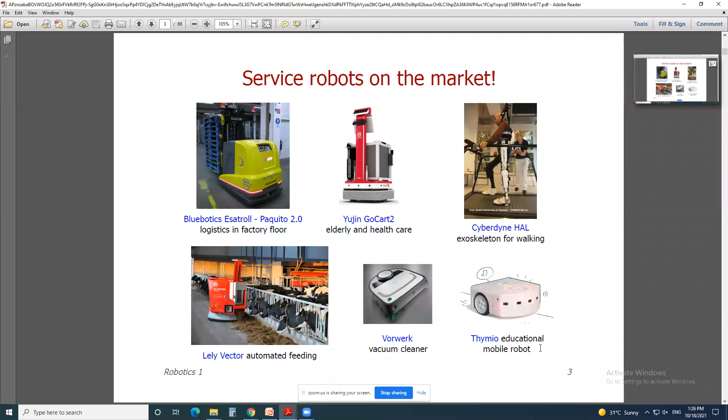Now space robotics, you are knowing that service robots are used for space exploration also. In 1997, NASA first sent the robot to explore the Mars mission.

Mars means Mangalyaan. This is the upper panel, that is the solar panel, because of which solar energy can be used to drive this robot. This is battery operated robot, and since wheels are there, this is known as wheeled robot.

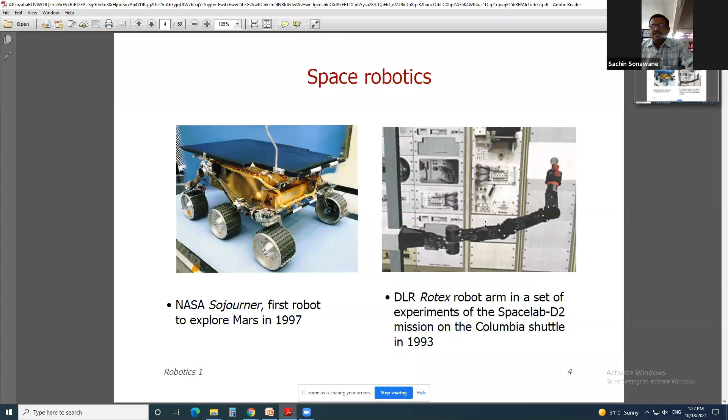Now this is known as Rotex robot arm, which is used in Columbia Space Shuttle in 1993. In Columbia Space Shuttle, our Indian woman was there, that name is nothing but Kalpana Chawla. She died because of that space shuttle accident.

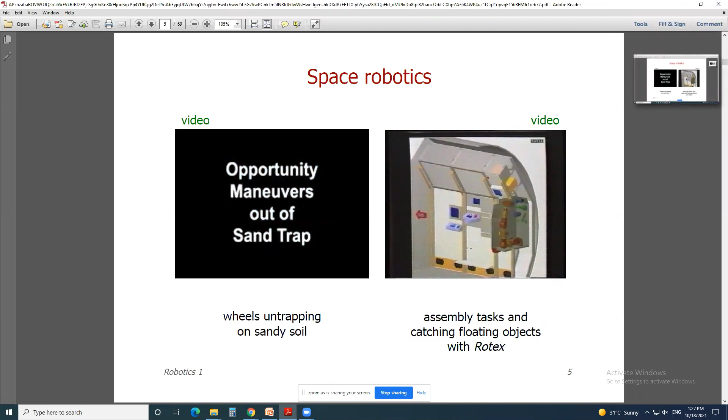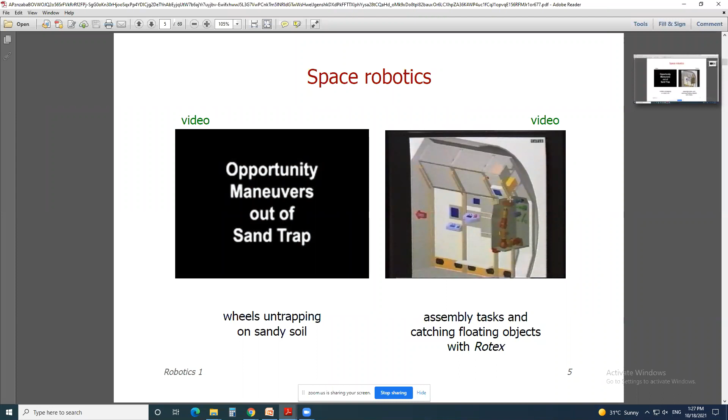Now space robotics. Robots are used for assembly tasks and catching floating objects with Rotex, that is in space robotics.

Then again here space robots are there. You just see here robotic arm, SSRMS Canadarm in operation on the space shuttle with outstretch of about 17 meters. See that this is the robotic arm which is operational in the space shuttle. This is the space shuttle.

Then these are the service manipulators. Service manipulator SPDM Dextre on the International Space Station mounted on a supporting rail and used to refuel satellites. Therefore, these small robots are mounted on a rail and they are used to refuel satellites.

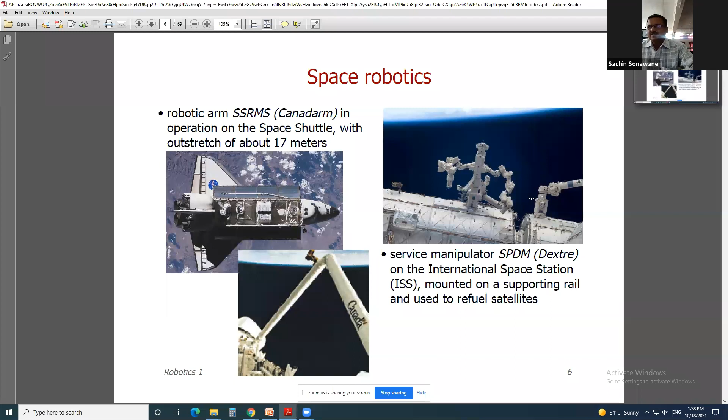Now, underwater robotics, typically actuated by thrusters, directional forces on the tail. Therefore, in case of underwater robotics, they are actuated by thrusters, and these are the directional forces which are acting on the tail.

Cannot translate sideways. These robots cannot roll, that is, they cannot turn sideways. Maneuvers are necessary for them. The different maneuvers, maneuver means what? To move forward or to move backward.

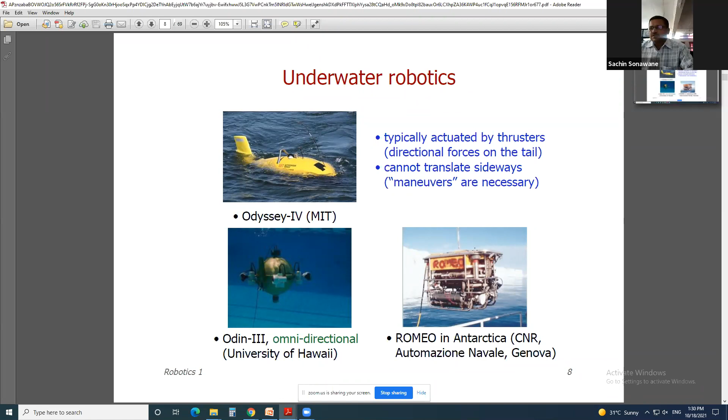Then this another underwater robotics is there. Omnidirectional, University of Hawaii, that university has manufactured this robot. Then this Romeo in Antarctica, CNR Automazione Navale Genova. Therefore, the name of this robot was Romeo, and it is used for Antarctica exploration.

Then underwater robotics again here. Ansaldo underwater arm performing a cable hooking task. See that this underwater robotic arm is there and it is used for cable hooking. This is the hook.

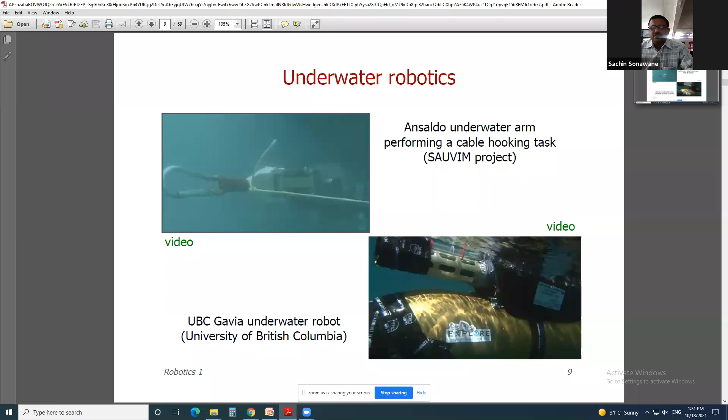Again, UBC Gavia underwater robot. See that this is the underwater robot, and this is the arm. University of British Columbia has manufactured this robot arm.

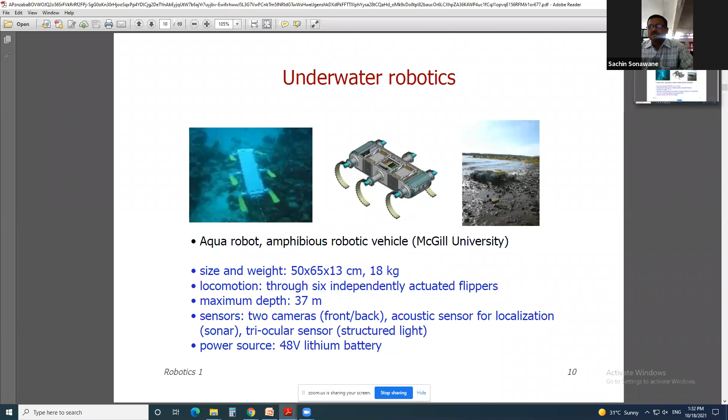Power source: 48-volt lithium battery. This robot is battery operated, its voltage is 48 volt, and this battery is a lithium battery.

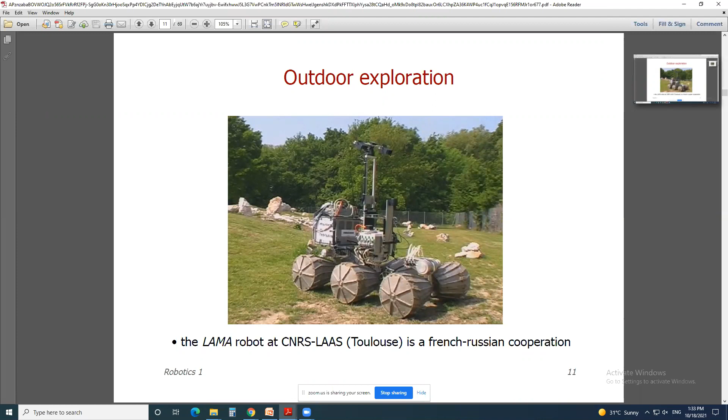Now service robots are also used for outdoor exploration. See that this is a wheeled robot. The LAMA robot at CNRS-LAAS is a French-Russian cooperation. Outdoor exploration means whatever is outside our home or on the ground - this robot is used to study rocks or the nature of the soil, for outdoor exploration, or to capture images in the jungle or wherever in the terrain where humans cannot reach.

Now volcanology - you know volcanoes. Near the volcano, because of high temperature, it is very dangerous to reach near it. Therefore RoboVolc vehicles are used on the surface of the Etna volcano - wheeled and tracked robots. This wheeled robot is used near the volcano to study the soil and rocks, or the type and temperature of the volcano. To study all these things, wheeled and tracked robots are used.

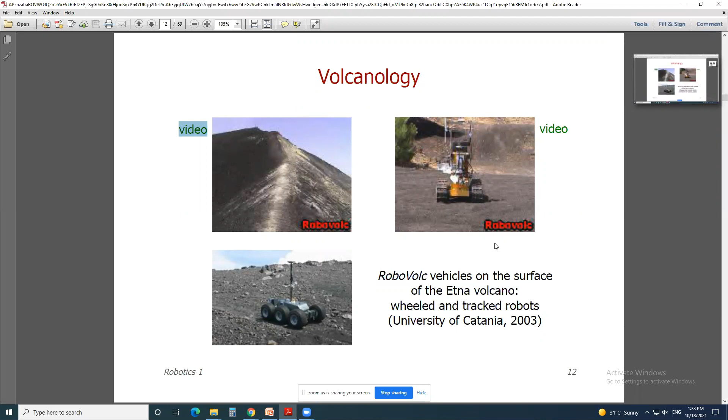Now for demining purposes, robots are also used. This is a teleoperated mobile robot on tracks, used by the police for bomb disposal.

Then PEMEX, a lightweight anti-personnel mine detector, weight 16 kg, maximum 6 kg for wheels, two 70 watt DC motors, oscillating sensorized head. This robot is used for mine detection. It has two wheels and some additional structure. Total weight is 16 kg, and weight of the two wheels is 6 kg.

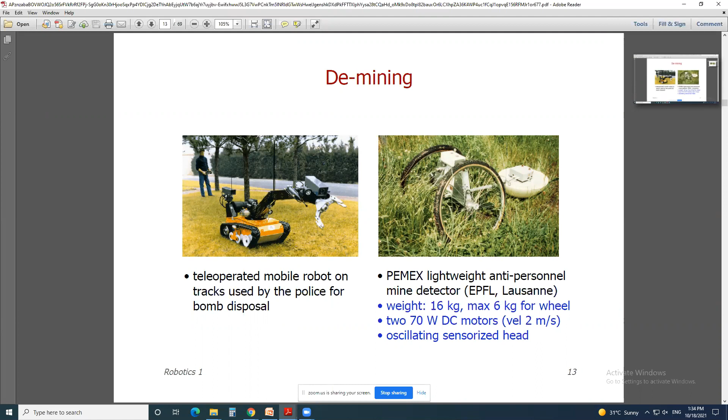Now service robots are also used for medical applications - this is known as medical robotics, for patient aid, meaning assistive applications. Here is a deambulation support system from Trinity College, Ireland. This robot is used for a deambulation support system, so that the person holds this robot in hand, and when the robot moves forward, the person follows it.

Then the MOVAID project, for the aid of disabled people in home activities. This robot is used for disabled persons - in India called Divyang. For Divyang persons, this robot helps them. See that in this robot's arm there is a glass of water, so the robot will give a glass of water to the disabled person.

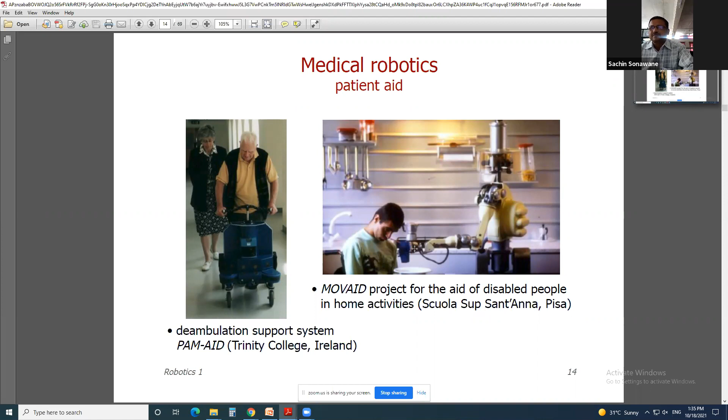Then the MOVAID project, for domestic activities using the 8R Dexter arm. See that there is an oven, and this robot is used to keep some food or something in the oven - the robot operates this oven.

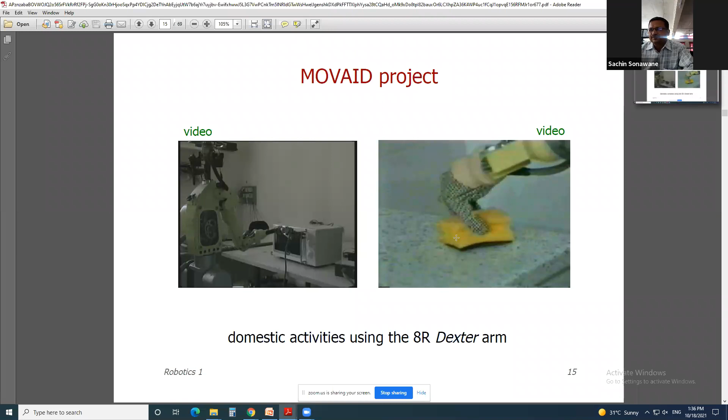Now again, for medical robotics - rehabilitative purposes, robotics is also used in medical industries. Rehabilitation is, as you know, when a person's arm or leg is amputated, a robotic arm or robotic leg is used in its place. That is nothing but rehabilitation.

Therefore a robotic arm with shoulder and elbow having full mobility and a gripper hand is used, developed at Pittsburgh University, and is also available in the market. In tests on monkeys with immobilized upper limbs, motion commands sent to the arm by the central nervous system - that is the brain - are measured by a set of electrodes and used to command the robotic arm. This robotic arm or robotic leg is used for rehabilitation purposes in humans where an arm or leg has been amputated.

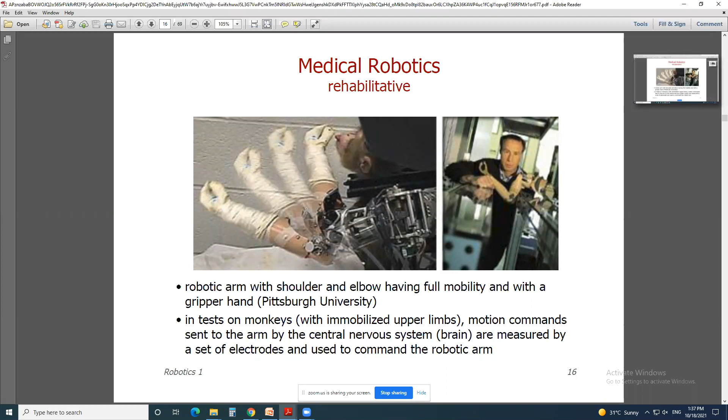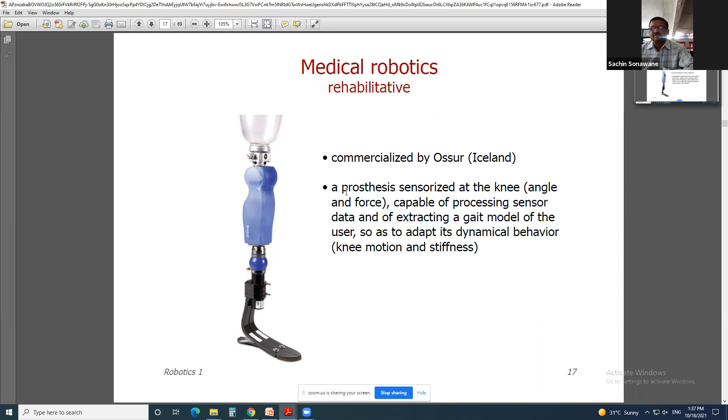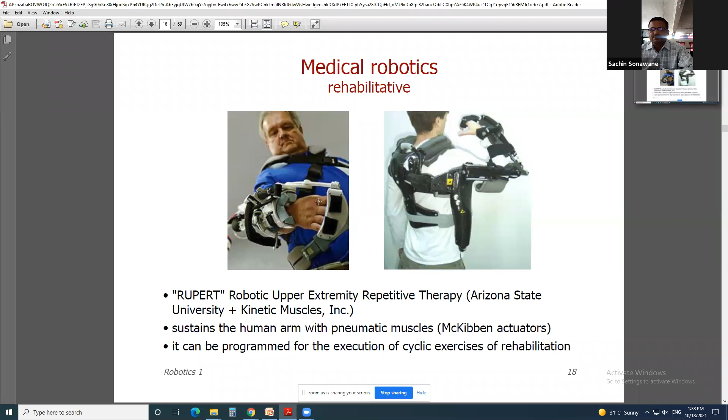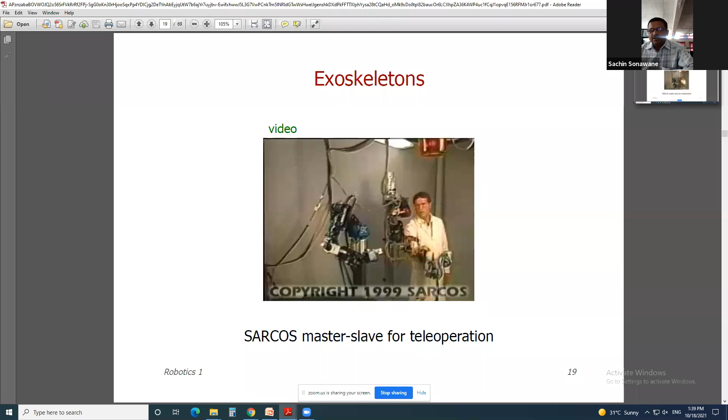Now, exoskeletons - already I told you. Exoskeleton for human arm and human leg, it is known as exoskeleton.

Then medical robotics, hospital and nursing - for hospitalization and for nursing. Nurse means what? Nurse means to take care. What is the meaning of the nurse? To take care. It is the verb also, verb also and noun also.

Therefore, Helpmate Mobile Robot USA works in hospitals as an auxiliary person. This is the robot which is used in USA in the hospital, working as auxiliary personnel in place of a receptionist.

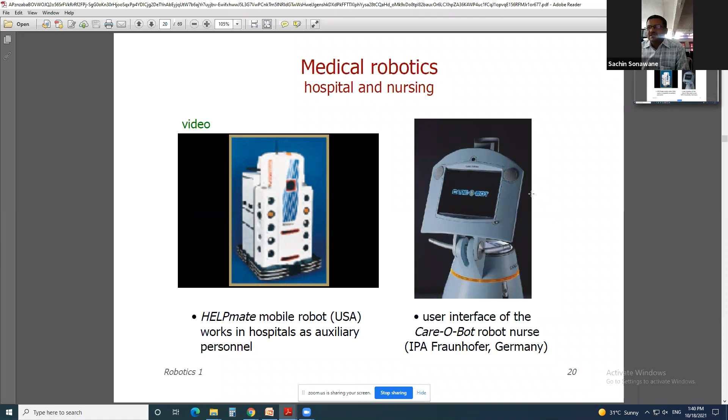Then this is the user interface of the Care-O-Bot robot nurse. This is the care robot, one type of robot which can be used as nurse. It can tell you when to take medicine, and that type of care this robot will take. This is known as a care robot.

Now, surgical robotics. Robots are also used during surgical operations to assist humans, that is known as cobots or collaborative robots. Overview of the operating room.

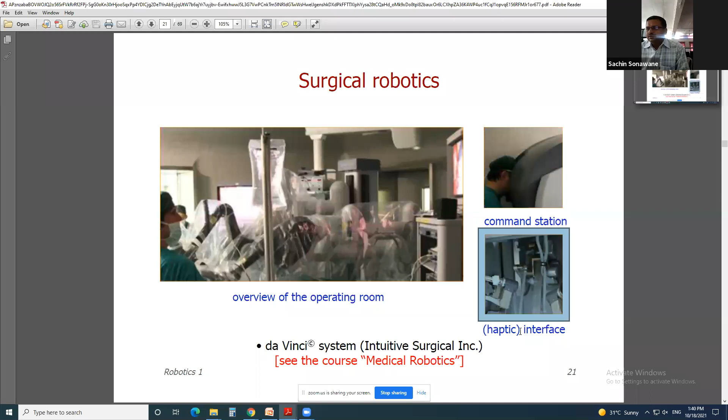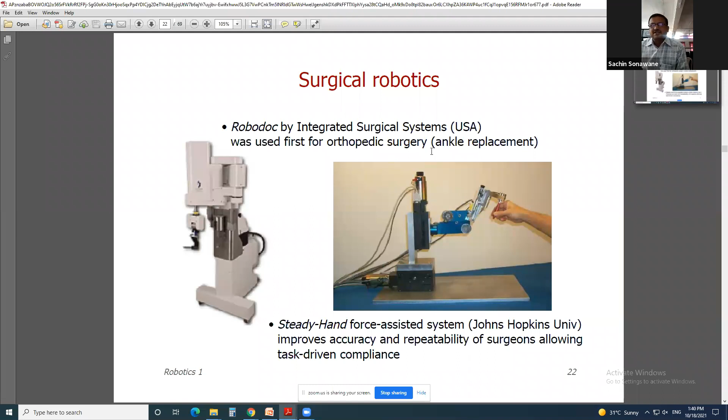Then surgical robots - RoboDoc by Integrated Surgical Systems USA was used first for orthopedic surgery, that is for ankle replacement. Then the steady hand force assisted system improves accuracy and repeatability of surgeons, allowing task driven compliance. Therefore, robots are also used in surgical operations.

Now, surgical robotics - here this human is operated by robots, figure in the picture. Emulation of a laser brain surgery operation and graphic rendering of a surgery intervention on the spinal cord. These robots are used for doing operations on the spinal cord.

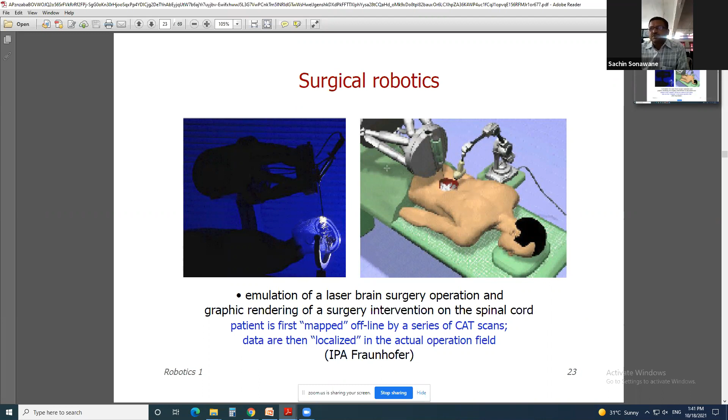Patient is first mapped offline by a series of CAT scans. Data is then localized in the actual operation field. First this patient is mapped - the first figure indicates mapping of the patient, that is where the operation is to be carried out. Then the actual human is placed, and these robots are doing these surgical operations on the human.

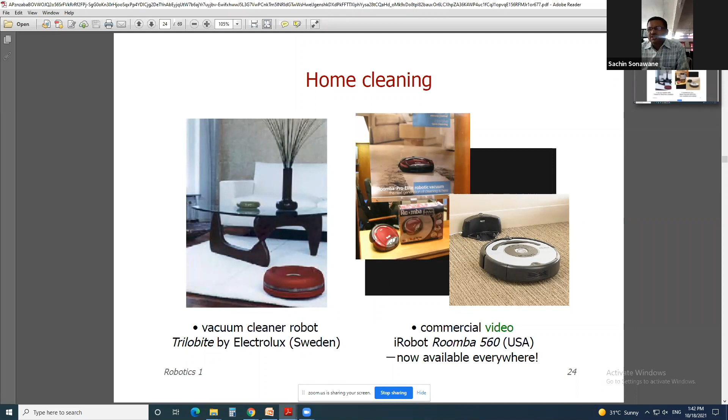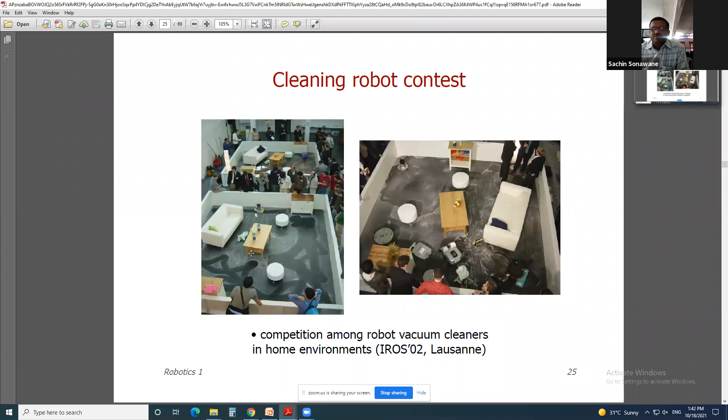Then cleaning robot contest - competition among robot vacuum cleaners in home environments. These are different robots you are observing, used for cleaning the floor, and this is the competition. Here two robots are there, here again two robots are there. The competition is which robot is faster and which robot is more accurate.

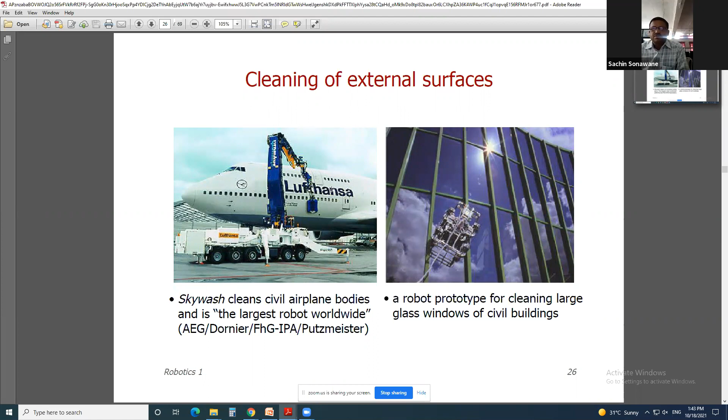Cleaning of external surfaces - for the aeroplane, it is not possible for the human to clean the aeroplane externally, so robotic arms are used to clean aeroplanes externally. Skywash cleans civil airplane bodies and is the largest robot worldwide. A robot prototype for cleaning large glass windows of civil buildings - large glass windows are there in the USA, and this robot is used to clean these large glass windows and to clean external surfaces on aeroplanes.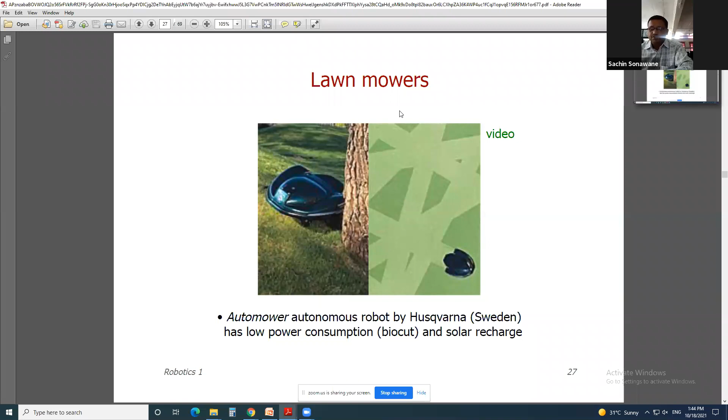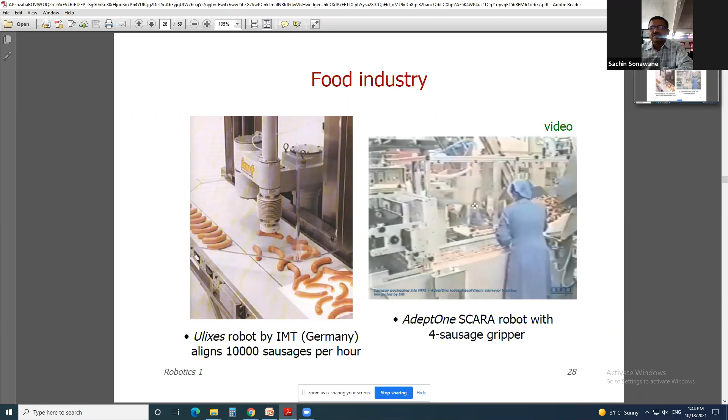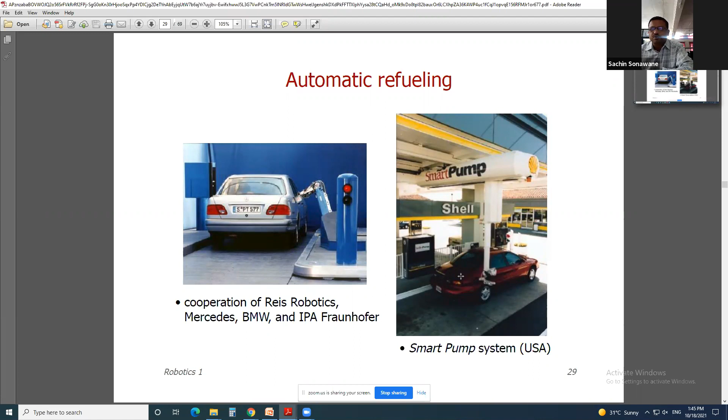Now automatic refueling, in cooperation with Reis Robotics, Mercedes, BMW and IPA Fraunhofer. See our smart pump systems in the USA, where a robot is used to refuel the car. In India, we observe that humans are standing there refueling our 2-wheelers or 4-wheelers. But in the USA, this robotic arm is used to refuel the car. Therefore, this is known as service robotics, used to serve.

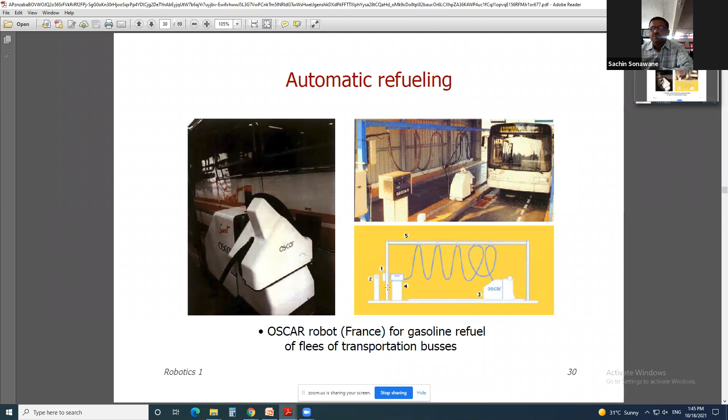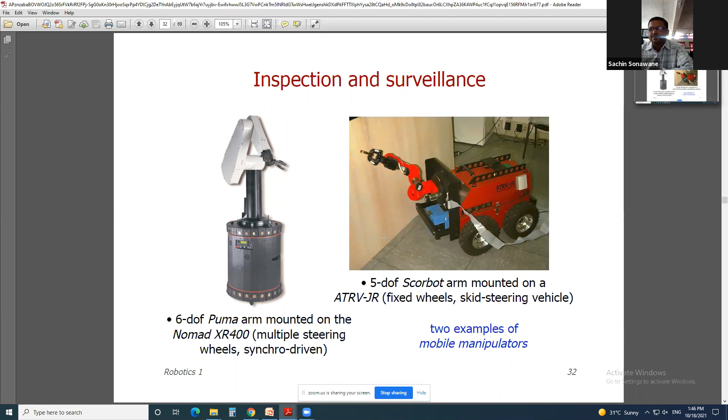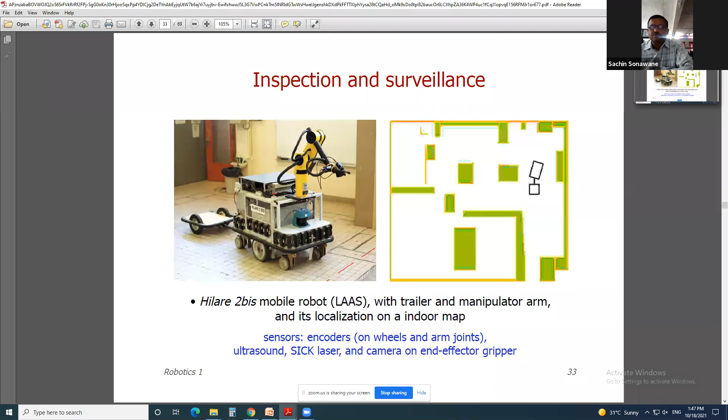Different sensors, encoders on wheels and arm joints are there. Ultrasound, laser, and camera are on the end effector gripper. Laser sensors, ultrasound sensors, and encoders are fitted on the wheels and arm joints. Therefore, different sensors are fitted on this robot.

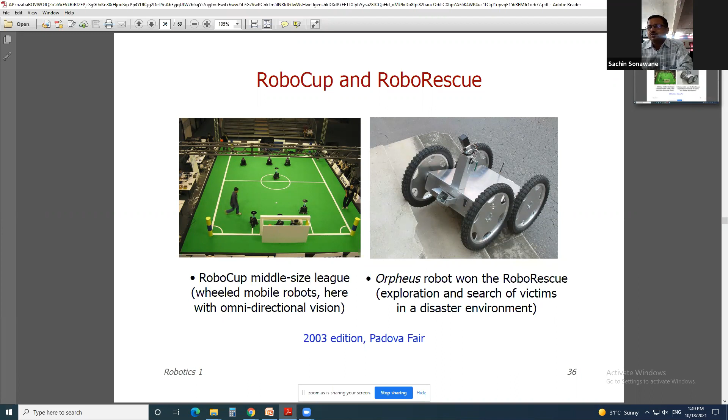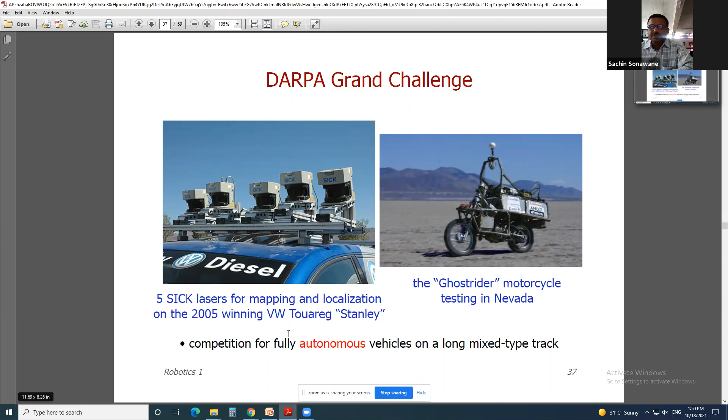This is a competition for fully autonomous vehicles on a long mixed type track. Robots are also used for driving two-wheelers. Again, the same thing is shown here.

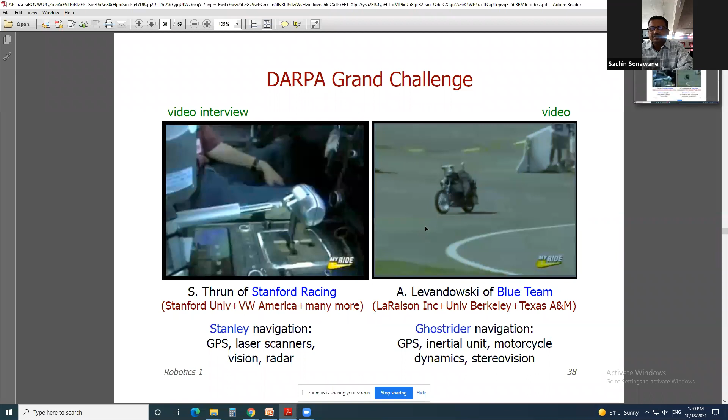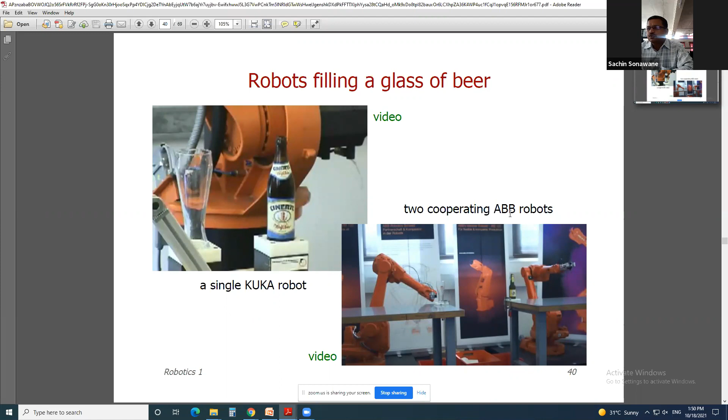A robot filling a glass of beer, sorry, water. This single KUKA robot is used to fill water. Then 2 cooperating ABB robots, these 2 robots are cooperating with each other.

Now for entertainment, robots are also used, such as the Anaconda robot by Edge Innovations USA, which weighs various tons, has 60 artificial spinal vertebrae, is 12 meters long, and is actuated by hydraulic motors so as to reach a speed of up to 60 km per hour. This is the Anaconda robot, used for entertainment purposes.

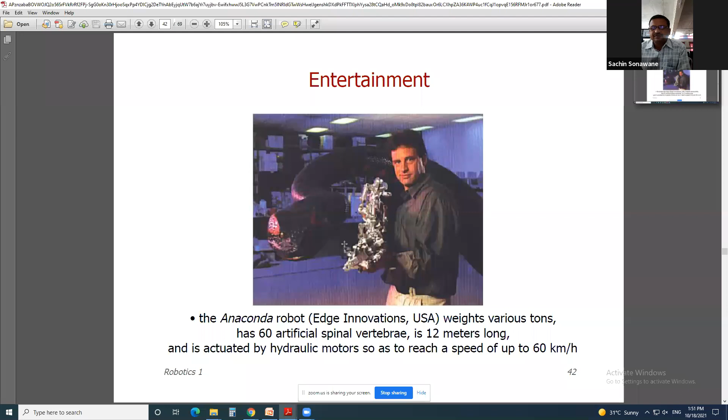All human motion replications were there. The anthropomorphic robot by Sarcos Entertainment Systems USA replicates the movements of a human wearing a sensorized exoskeleton.

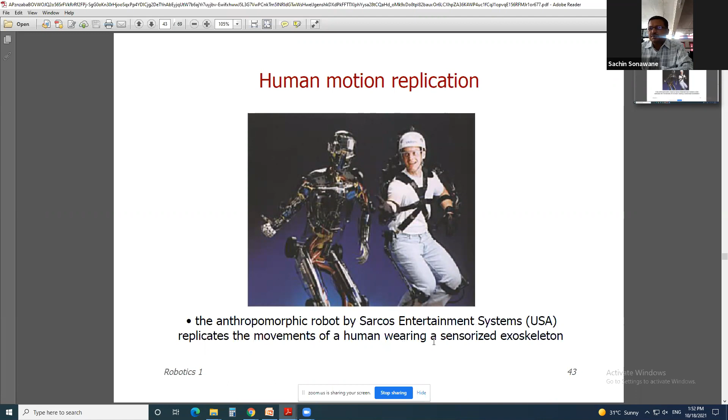Again, human robot interaction here. This human is interacting with the robot. They are congratulating or shaking hands with them. Physical and cognitive interaction level between Sarcos robot and a human. Intrinsic mechanical compliance in the robot structure is here more important than accuracy in motion execution.

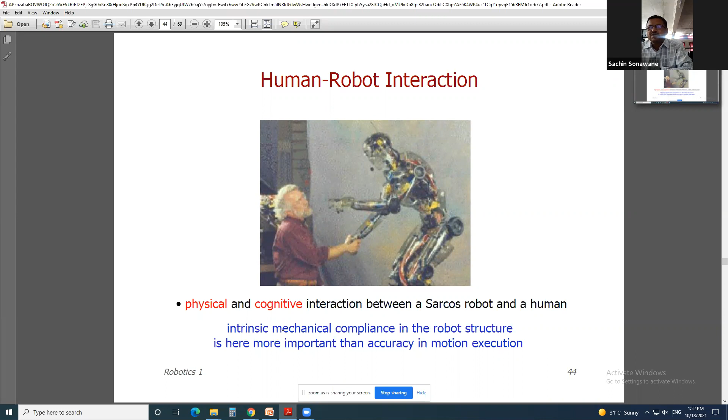Now human robot interaction, again same cases here. Cognitive interaction, this human is interacting with this robot. Same cases here, physical interaction, this human is interacting with this robot.

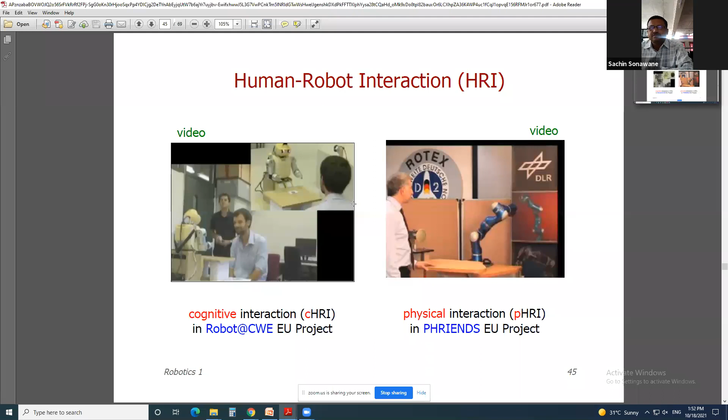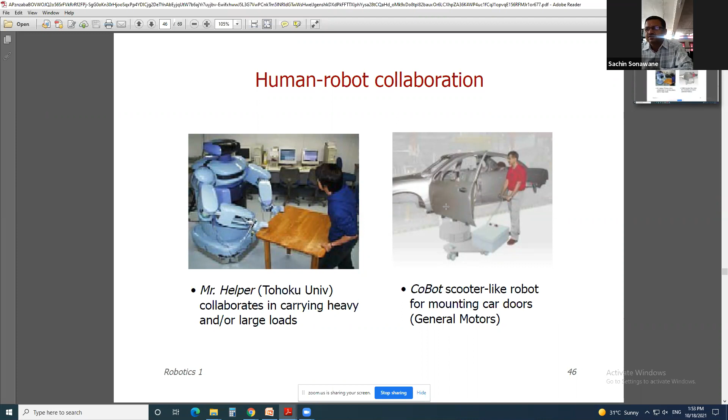Now robot hands, already I have told, robot hands and legs. Therefore, these are the robotic hands, these are the fingers. 3 fingers with 9 degrees of freedom, tendon actuation, supporting palm, and tactile sensors on all phalanges.

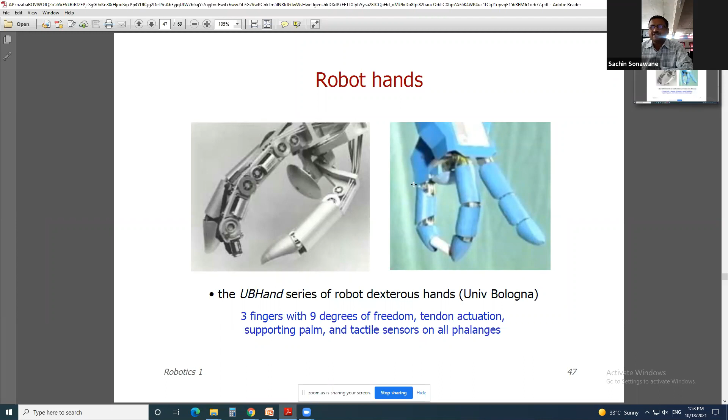Now, new robot hand for the iCub. See that this is the new robot hand. See that they have manufactured this.

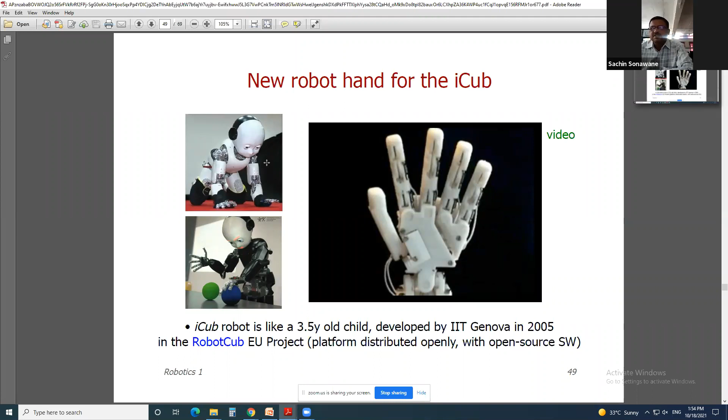One small kid which is playing with this ball. All the fingers are there, eyes are there. In the eyes, cameras are there, so that this vision system is there in case of robotics. Therefore, they have manufactured a 3.5-year-old child, developed by IIT Genova in 2005 in the RobotCub EU project. Therefore, this is nothing but another type of service robot.

Now, integration of robot hand plus arm. The complete UB hand 2 with electrical motors and electronics presented at Expo 92 in Seville. Integration in the forearm of the Unimation Puma 560.

Therefore, this robotic arm is integrated with the robot hand. See that these grippers are there. Grippers means fingers are there.

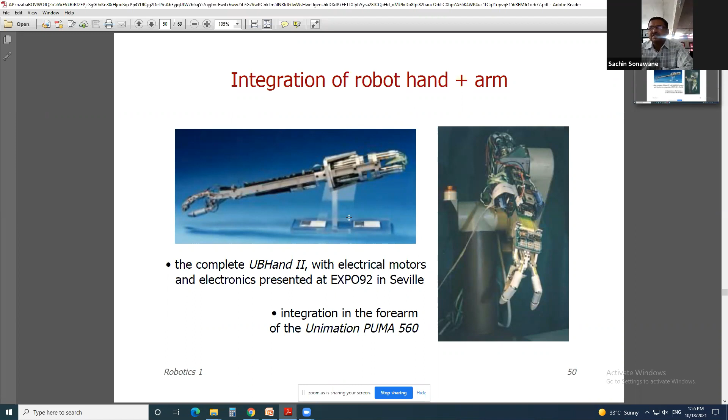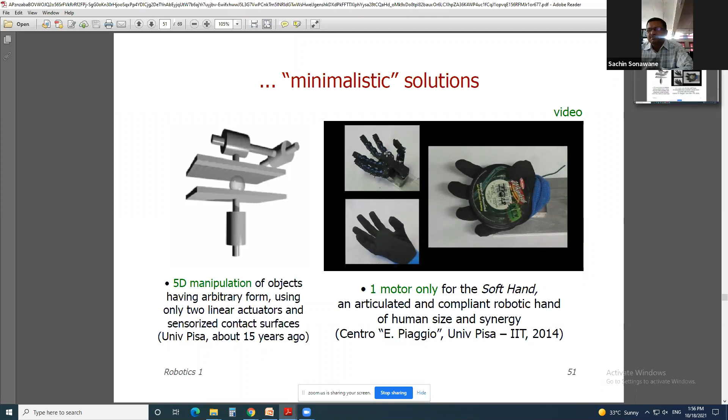Now, minimalistic solutions. 5D manipulation of objects having arbitrary form using only 2 linear actuators and sensorized contact surfaces. Here, this 5D manipulation is there, with one motor only, for the soft hand and articulated and compliant robotic hand of human size and synergy. See that this human arm is there, same human arm with fingers, they are manufactured here.

Now, biomorphic robots, by MIT Leg Lab, USA. It is known as Troody dinosaur and flamingo bird. See that this biomorphic robot, this is of dinosaur shape. Right hand side robot, if you are saying, is of dinosaur shape.

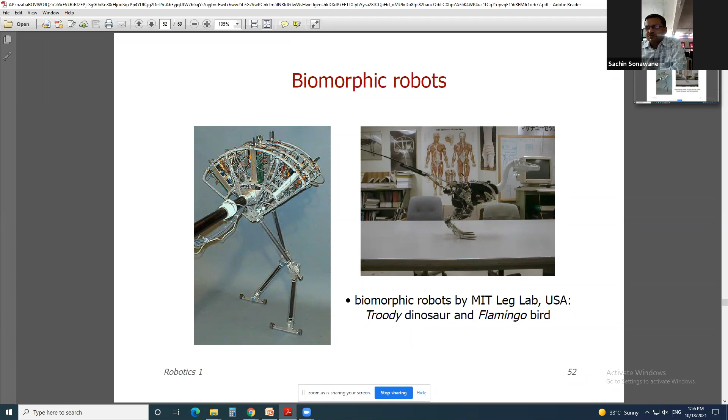Four-legged locomotion, we have seen this. Biomimetics, all this is nothing but biomimetics. This is the dog.

Robot in the shape of a dog. See that these dogs, we have seen the 2 videos, that is Boston Dynamics, their robot is known as Spot, and Cyber Dog by Xiaomi Corporation. We have seen these 2 videos in the last lecture in the biomimetics point.

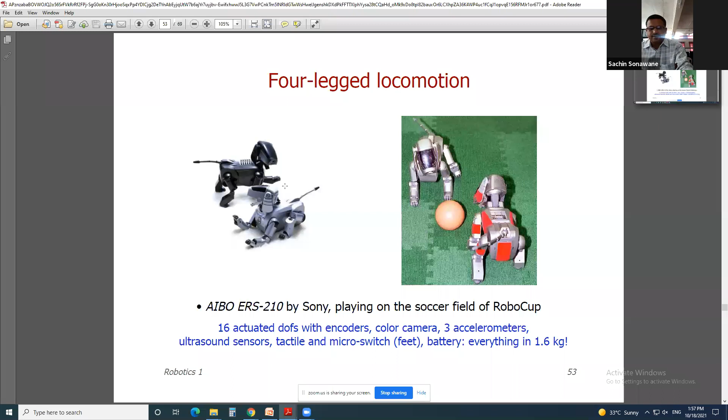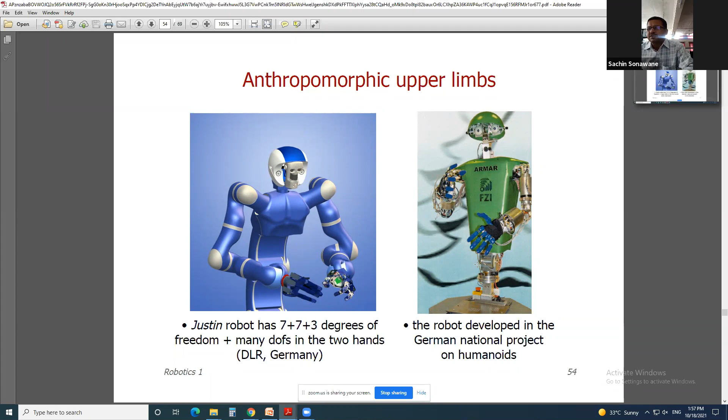Therefore, this robot is known as Justin robot, has 7 + 7 + 3 degrees of freedom plus many degrees of freedom in the 2 hands. It is manufactured by DLR Germany, developed by the German national projects on humanoid. See that this is a humanoid robot which is developed by the German national project.

Then, Justin robotic system.

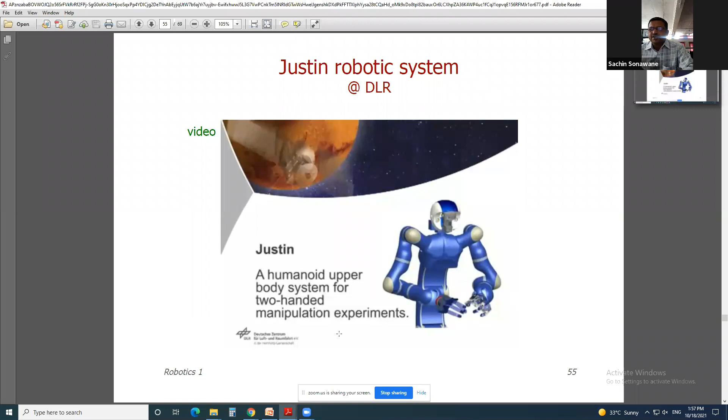A humanoid upper body system for manipulation experiments. These are the humanoid robots we have seen.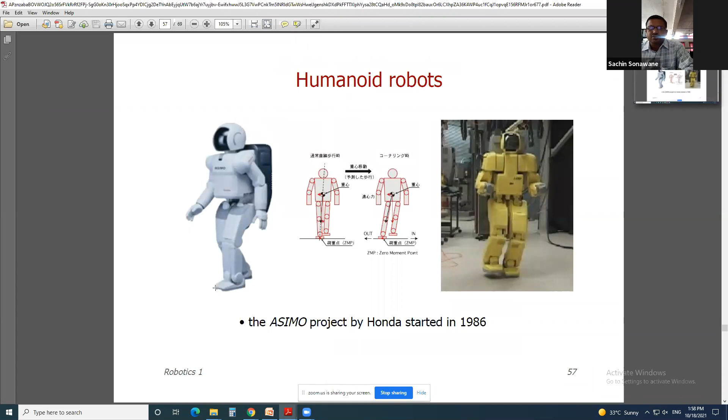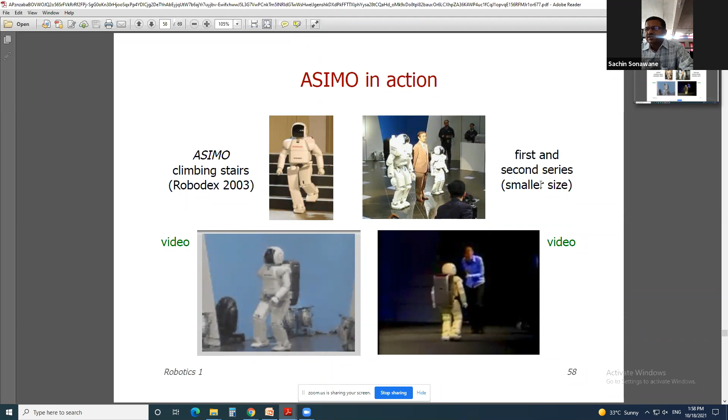Asimo in action. See that this Asimo robot is climbing the stairs. Also, it is used to interact with humans. Here, it is walking on the floor.

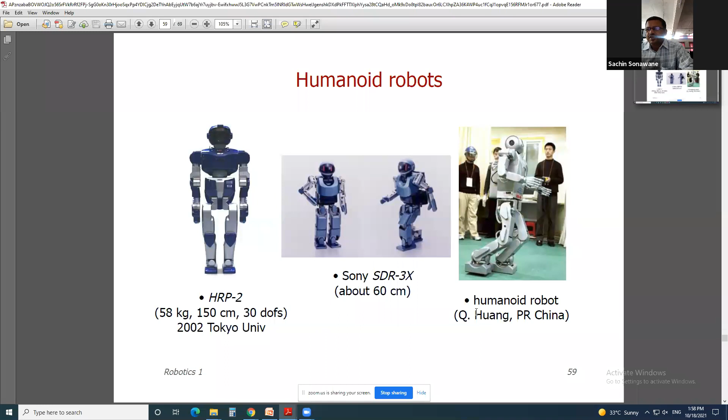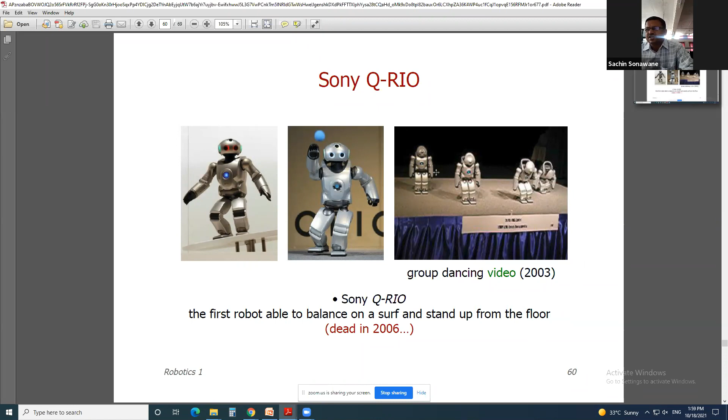Sony company has manufactured these small humanoid robots, which are group dancing. See that all these robots are dancing in a group, just like a group dance of humans. See that this humanoid robot...

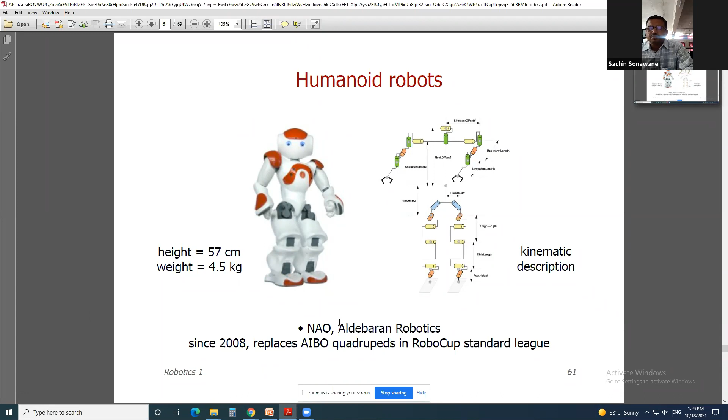Its height is 57 centimeters, weight is 4.5 kg. This is the kinematic description: foot height, tibial length, thigh length, hip offset, same as that of humans. They are manufacturing the robot known as humanoid robot.

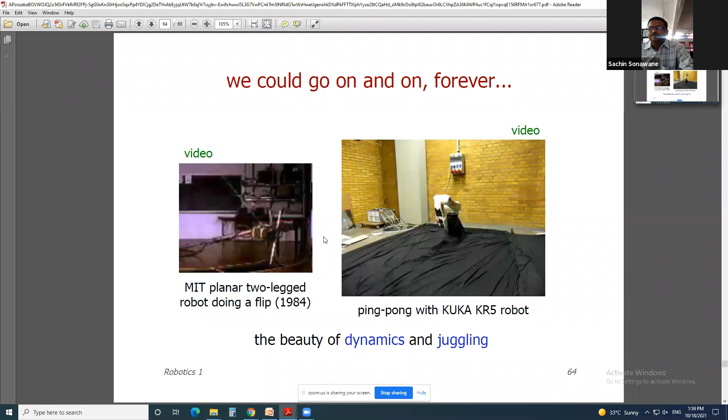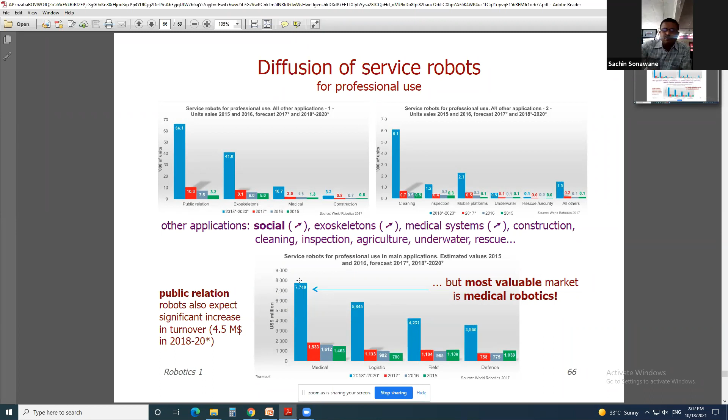But the most valuable market is medical robotics. See that hereafter you will find robots used in the medical industry. It is the most valuable market - that is the growing market for robots, in the medical industry.

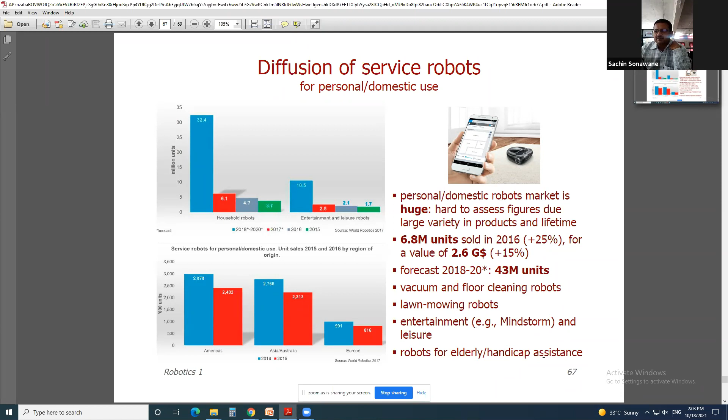Now robots can be used for vacuum and floor cleaning, lawn mowing, entertainment and leisure, and for elderly or handicap assistance. Then diffusion of service robots, manufacturers by application and regions.

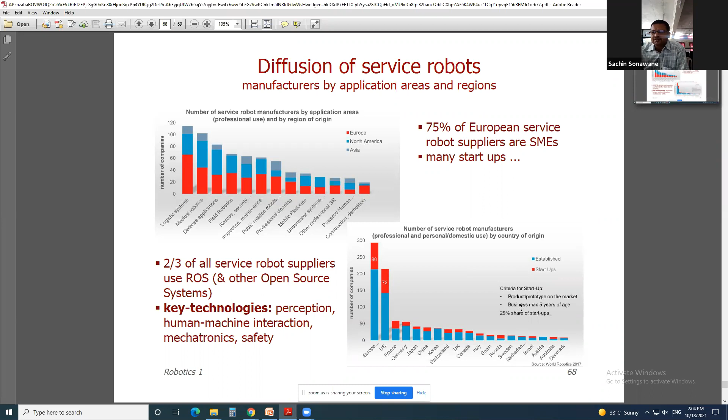Criteria for startup: product or prototype on the market, business maximum 5 years of age, 29% share of startups. Therefore, this is nothing but service robots.